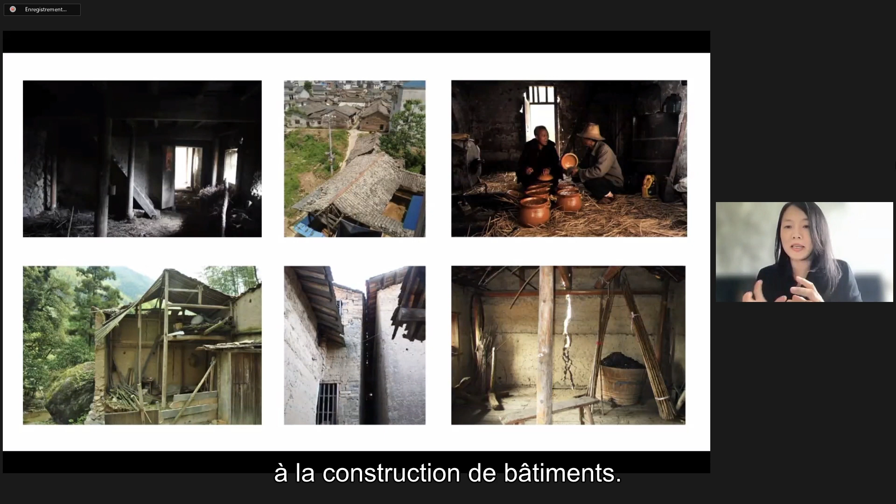This is a process where we realized that architectural engagement in rural areas is not just about making buildings, but rather to integrate with the local history, context, tradition, heritage, and most importantly the local community, and to provide a systematic and sustainable solution for rural issues.

So in this way, we adapted this method called architectural acupuncture. It's a way of introducing small cultural public programs into each village context, tailored according to its own context. At the same time, this is a remedy to restore the village's rural identity and to serve the community and the village collective, and also to bring in new social, cultural, and economic potentials for each village.

So in general, it's actually a mapping system, to promote and reactivate circulation within this county region.

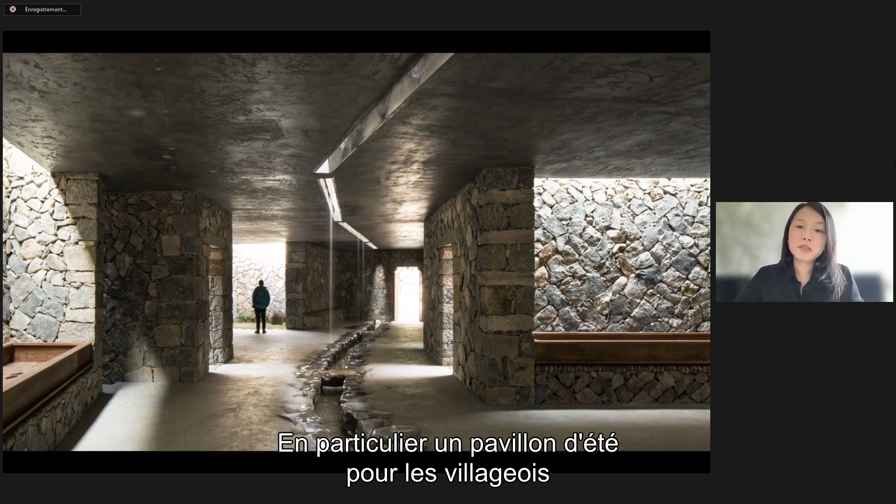For example, you can start by looking into the cultural context of this Hakka village, and the program of a Hakka indenture museum is also the opportunity to restore local long-lost masonry building techniques. At the same time, it provides an open space, leisure space, especially a summer pavilion, for local villagers and visitors.

And we also look into abandoned infrastructure in the rural region, for example the abandoned Shimen Bridge.

Instead of demolishing this unsafe structure, we proposed to preserve it by adding a new canopy reflecting the rhythm of the bridge structure, while also creating a collective space for villagers across the rivers, visitors, and regional communities to accommodate different activities.

A simple structure like this actually relates to the traditional lounge bridge, so there's context. At the same time, the lounge, the common space provided by the bridge, also becomes an important community meeting space.

So in a way, working in a rural context, you're looking into different possibilities, but it's always related with tradition and heritage, with a purpose to bring a better future for the local community.

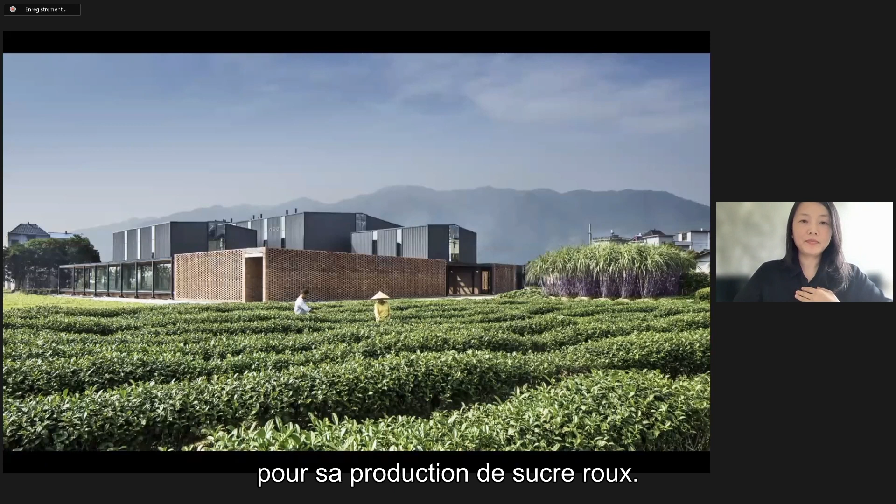For example, this village is best known for brown sugar production. So a new brown sugar factory is built to reunite, to integrate all the existing family workshops.

Basically, they were working in their family kitchen. At the same time, this can also upgrade the production quality to increase the product price. So the traditional way of producing these

products, for example like brown sugar, is already a striking performance. We take this factory, and the production space automatically becomes a sense of a stage, a theatrical sensation to introduce to an audience, to open up and increase the

visitors, the amount of visitors and circulation in this area. It also runs 24 hours. So this kind of production as performance really attracted many visitors to the region during the winter production season.

This factory is also functioning as a live museum to showcase the traditional heritage, but at the same time also functioning as a village community space, a cultural space for different cultural programs and community activities.

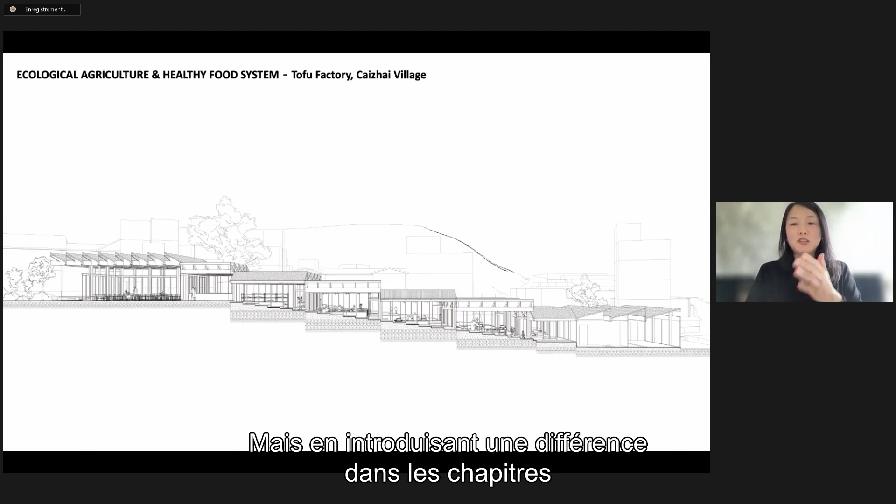So it's really generating a new type of collective economic structure in different village communities. Like the brown sugar production, this has also opened up a possibility for a performance or a live museum to attract visitors, introduced in different chapters or episodes based on the sequence of different production.

And it's open to the visitors for educational, for cultural purpose, but also can provide a meeting space for both the visitors and local villagers.

So in all of these projects, there's an intention to introduce light maintenance. Of course, the building is operated by the villager union, but at the same time, light maintenance can be more sustainable in the rural context. So in a way, sustainability in a rural context is always about the integration of social, cultural, economic, and ecological aspects.

And in the past years, we have really seen young people returning to this region. I think over 8,000 people by now have returned to the region, and many of them, at a younger age—30 to 40, under 50 years—are initiating new businesses, startups in the region with their experience from the cities.

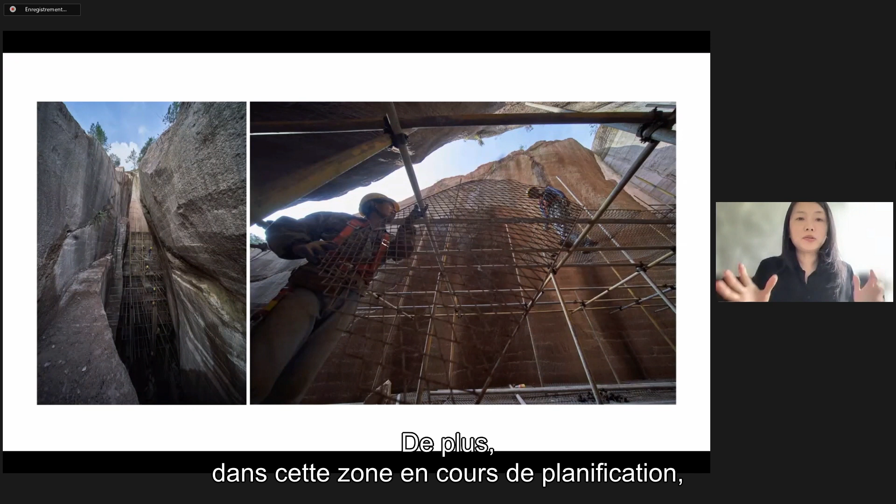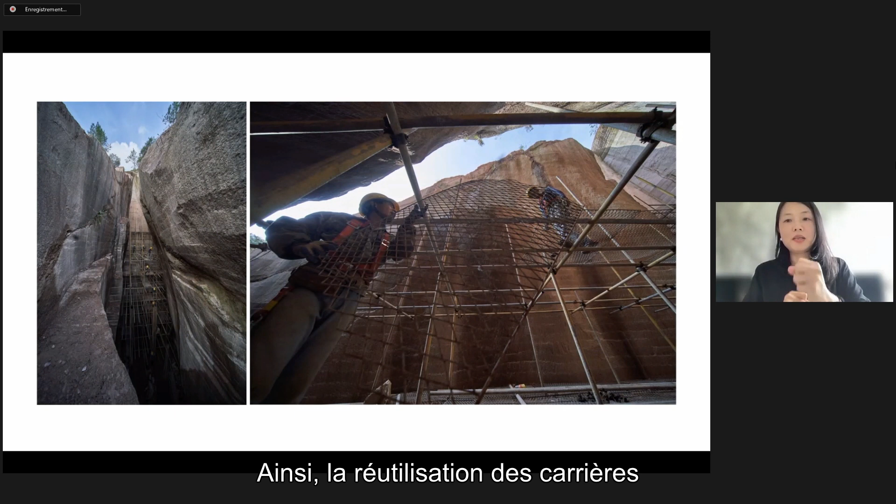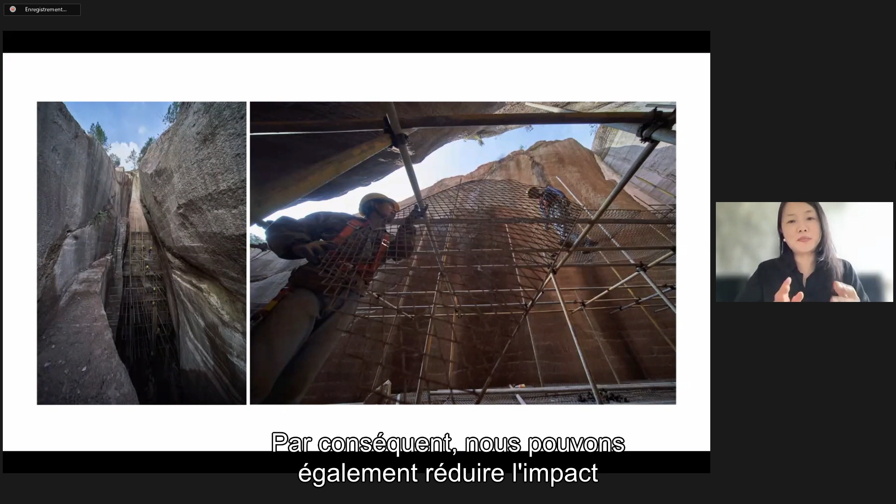So we were working with the local authorities and village communities, especially the local quarry workers, by providing a very practical planning proposal to the local government, saying that these quarries definitely have potential, and by introducing a new program based on each quarry's identity and qualities, they could be converted into cultural or social leisure programs. Also, this area is under planning to introduce new buildings for cultural programs, so maybe the reuse of the quarries can reduce the amount of new construction, therefore reducing the climate and environmental impact.

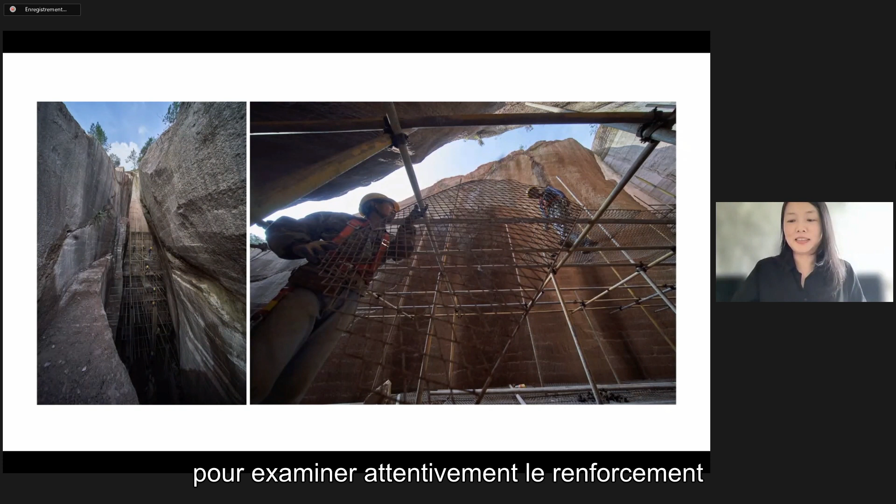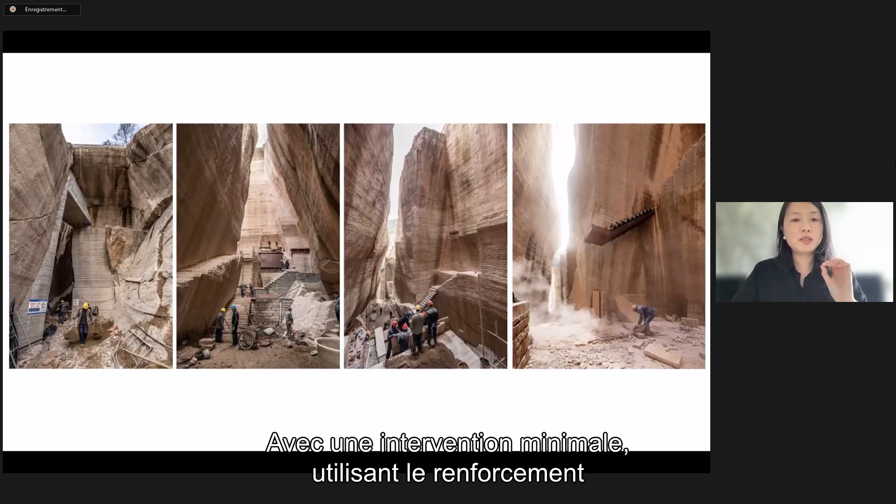So this is also a very careful engineering process with geotechnical structures, looking carefully at the safety reinforcement of these abandoned quarries, with a minimal intervention approach, introducing only the necessary reinforcement of safety for the structure. And at the same time, the adaptive reuse of these different quarries is based on each quarry's own characteristics, so in a way it's also acupunctural, with minimal intervention.

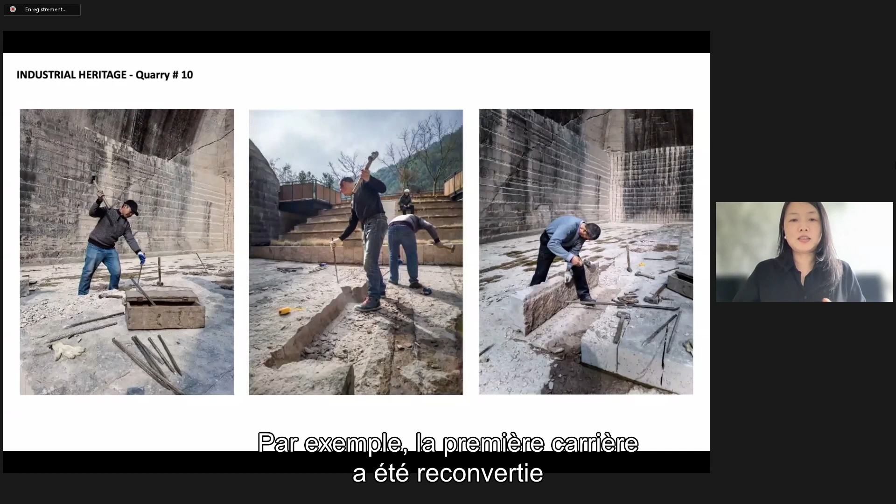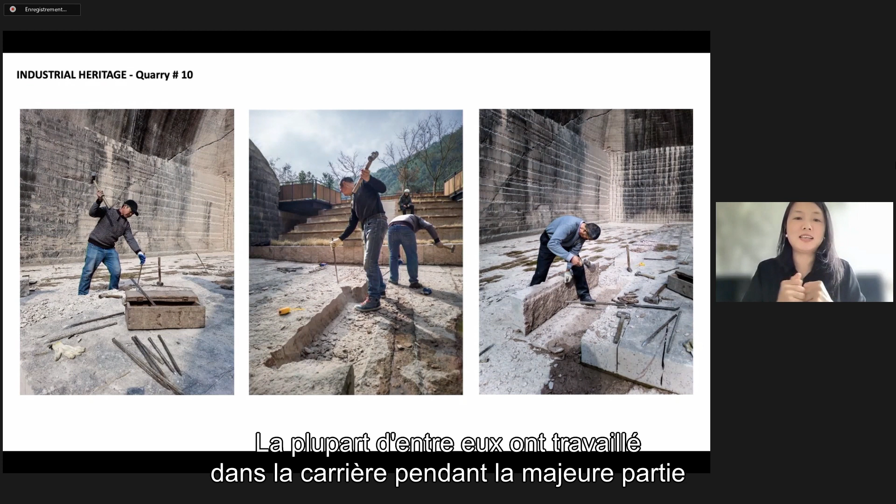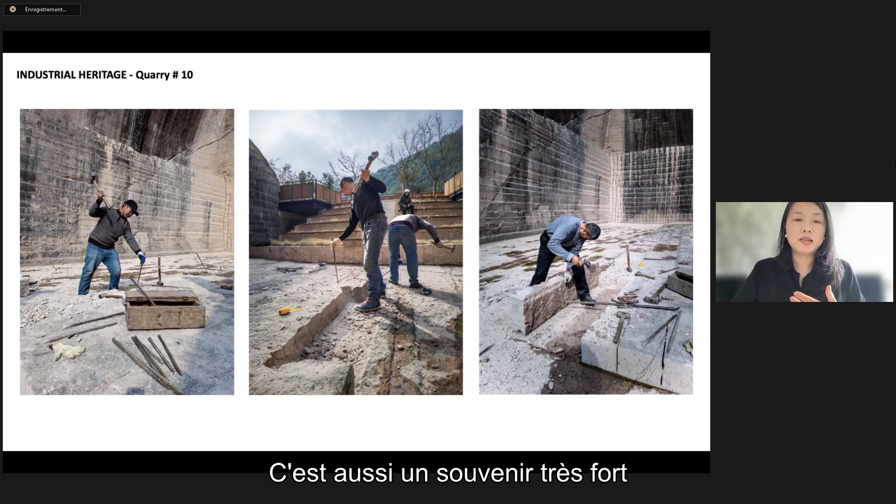For example, the first one is reconverted into a live stage. It was by the request of our quarry workers to provide a stage after over 20 years, so they have their own stage again to perform their quarrying technique and heritage, since most of them have been working with the quarry for most of their lives. It's very intense work, but there's also strong memory and sentimental attachment to this heritage.

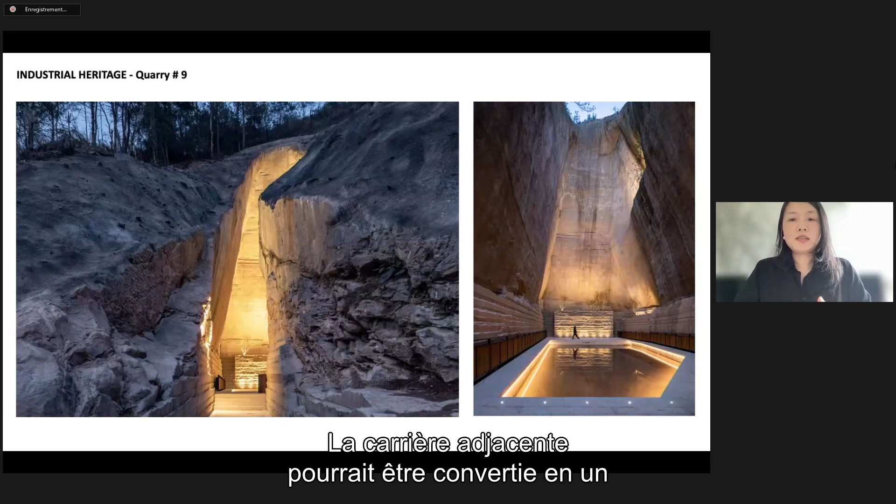And the design intervention again is minimal, only to preserve the original characteristics of each quarry with a proper new program. At the same time, all these quarries are open, public, cultural, community space for both visitors and villagers.

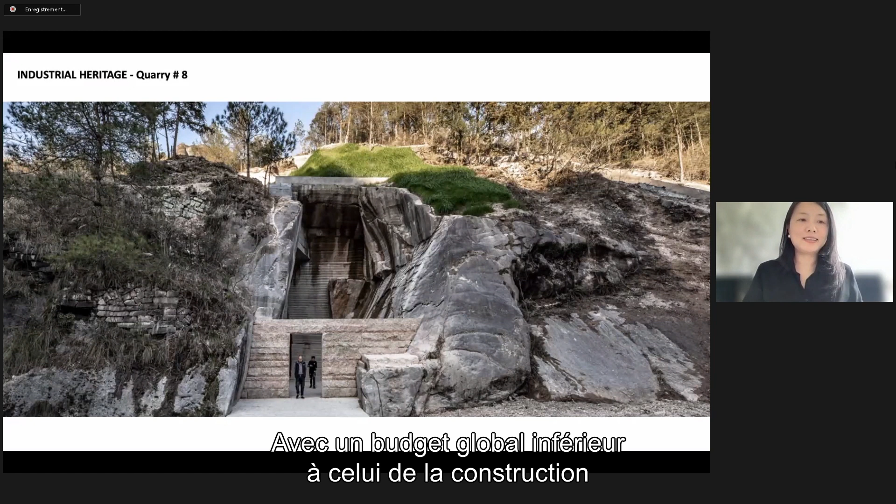And the construction of these quarries takes much less time. Three quarries are done within 6 months, with an overall budget less than making one new cultural building. So in a way, it's also a very economic strategy for the local authorities, also for the local communities, to revive these abandoned quarries. There's also potential with the remaining 3,000 quarries altogether.

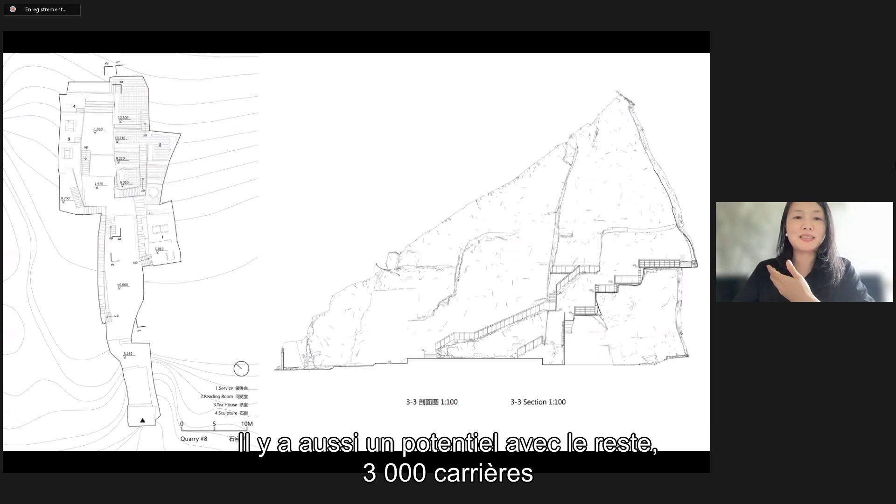And the last quarry is also the adjacent one, but has more of a sequence of entry and then a larger interior in the cave. This is dedicated to local culture and calligraphy heritage, preserving the original geometry and interior topography, and introducing just a very soft membrane surface for activities, for passages, and for reading terraces.

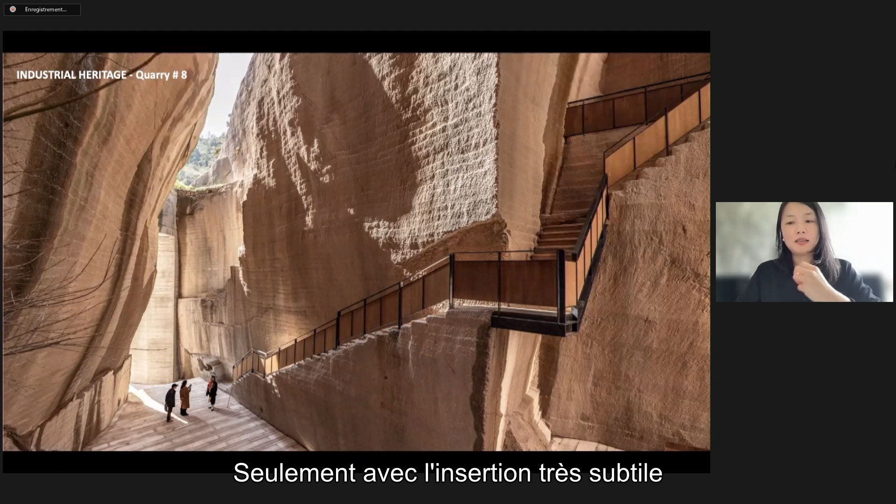We call it the book mountain, with only a very subtle and minimal introduction of a new walkway, a new passage. The whole quarry is presented as a monumental space dedicated to our quarry workers and to the local quarry heritage. So we see these quarry spaces are not only, with the design intervention—

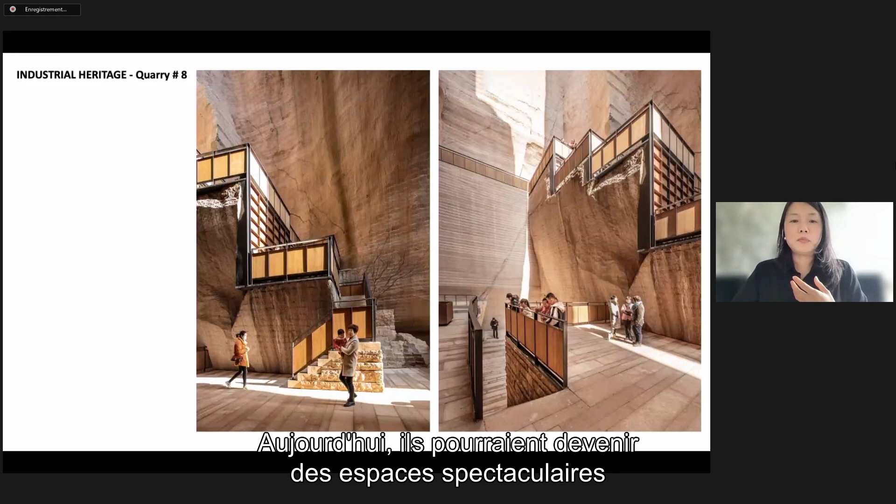These abandoned quarries, or local waste resources, can be turned from negative to positive, into valuable resources. But at the same time, it's also to restore the collective memory of the local thousands of years of quarrying tradition and heritage, especially for the older quarry workers—these spectacular spaces are really handmade by these quarry workers, spent in their lifetime, decade by decade, generation by generation, working in what used to be a very harsh environment. Now these could become somehow spectacular, monumental spaces that are also welcoming community spaces, really restoring the collective memory and also the pride and honor of these villages. Thank you very much.